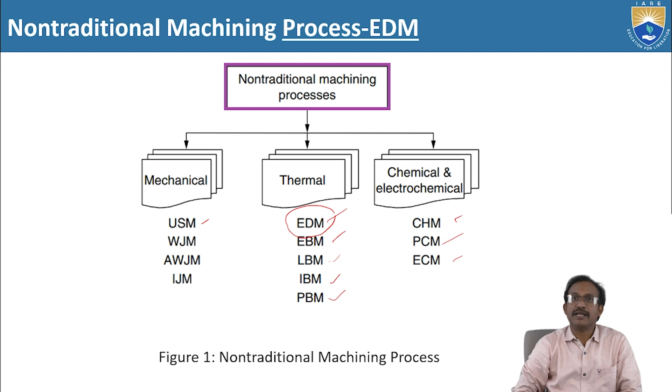So far we have discussed the different fields of electro discharge machining. Under that we have discussed electro discharge grinding and abrasive electro discharge grinding. Now we are going to discuss abrasive electro discharge machining.

Abrasive electrical discharge machining, in short AEDM, is a hybrid process based on EDM, that is electro discharge machining, where free abrasive grains such as silicon carbide powder are added to the dielectric liquid.

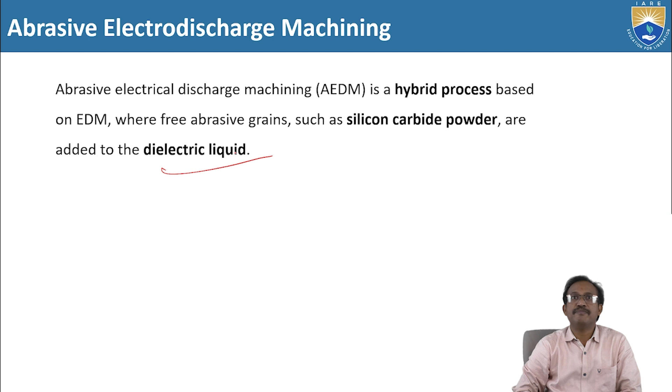Here the abrasive particles are added to the dielectric fluid medium so that it will be just like a slurry. That is nothing but abrasive electrical discharge machining.

Now look at these elements of abrasive electro discharge grinding process. Here, in abrasive electro discharge grinding, it is divided into two main phases: one is the grinding phase, the other is the electro discharge machining phase.

In the grinding phase, it is the MA phase, that means machining by abrasion, where the abrasion is done through grinding. In electro discharge machining, the corresponding phase is the EDE phase, that is electro discharge evaporation phase, usually in the form of plasma. In grinding, the MA phase is in the form of abrasive.

These two get together to form an abrasive tool. Here this abrasive tool is the cathode and the workpiece is the anode. Between these two, dielectric fluid medium passes, and the gap between the abrasive tool and the workpiece is the spark gap, where the spark is generated, usually below 0.01 millimeters.

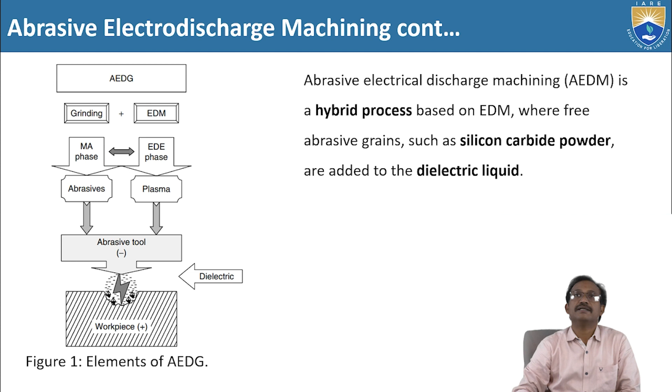In addition to the major EDE thermal phase, MA assistance is added. The EDE phase is as usual in electro discharge machining, but here through this grinding process, the MA phase, machining by abrasion, occurs because of the abrasive particles.

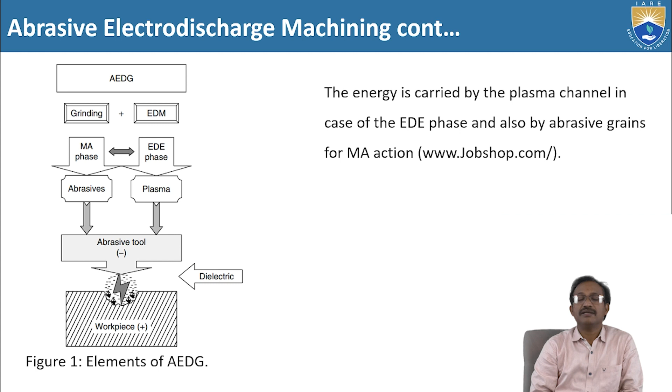The energy is carried by the plasma channel in case of the EDE phase, and also by abrasive grains for the MA action. The total energy is carried by these two components: the plasma phase component in the EDE phase, and the abrasives in the machining by abrasion phase.

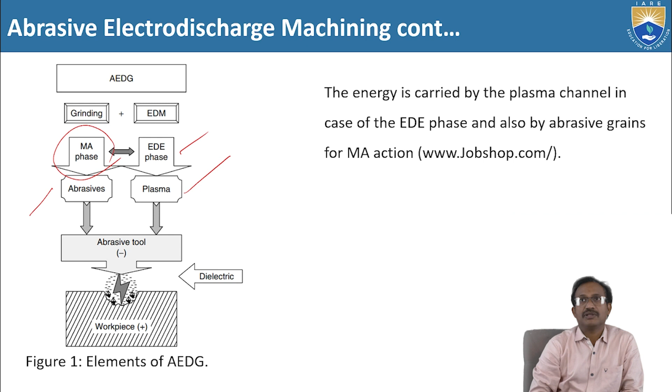Now look at this abrasive electro discharge machining system. Through this channel or arrangement, dielectric plus abrasives are supplied to the workpiece and tool. Here the rotating tool rotates and the workpiece travels towards left or right based on the requirement.

At the time of this machining process, since this is a hybrid process, the dielectric fluid medium consists of abrasives. Through this nozzle, dielectric and abrasive particles are supplied constantly or circulated between the rotating tool and the workpiece.

See, the machining media consists of dielectric and solid particles as indicated in this figure. Here the tool is rotating about its own axis, and it can traverse up and down: feed plus vibration plus orbital motion.

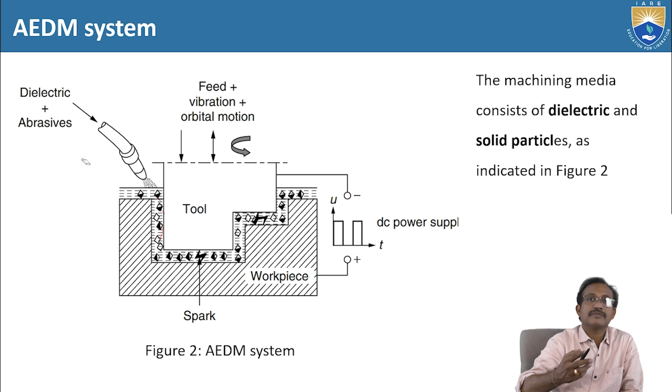Because of the tool motion, and at the same time because of these abrasive particles along with the dielectric fluid medium, the machining process takes place. So that's why it is a hybrid process.

In the abrasive electro discharge machining system, let us discuss the mixing. Mixing silicon powder into the dielectric reduces the electrical capacitance across the discharge gap by increasing the gap size.

Okay, mixing silicon powder into the dielectric. See here, this is silicon powder, let us say, mixed into the dielectric fluid, which reduces the electrical capacitance across the discharge gap by increasing the gap size. As a result, there is better dispersion of sparks and improvement in the discharge characteristic, especially in the machining of a large workpiece.

So here let us focus on the result of mixing silicon powder in dielectric fluid medium: better dispersion of sparks and improvement in the discharge characteristics, especially in the machining of a large workpiece.

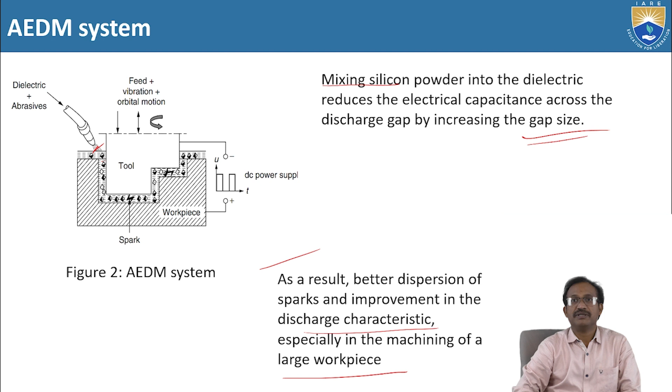The introduction of mixed powders as working media allows abrasive electro discharge machining (AEDM) to produce complex shapes having a mirror finish and an affected layer which is uniform and free from cracks.

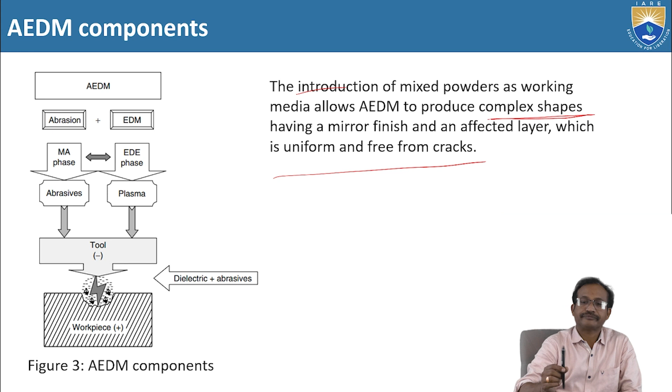Let us discuss the uses of AEDM. AEDM, that is abrasive electro discharge machining, is widely used to produce dies without the need to remove the heat affected layer using mechanical polishing. So here, without affecting the heat affected zone - that is the important point.

The process is therefore widely used for producing plastic molding dies. So a very particular application of AEDM is to produce plastic molding dies. Why? Because it is not necessary to remove the heat affected layer using mechanical polishing.

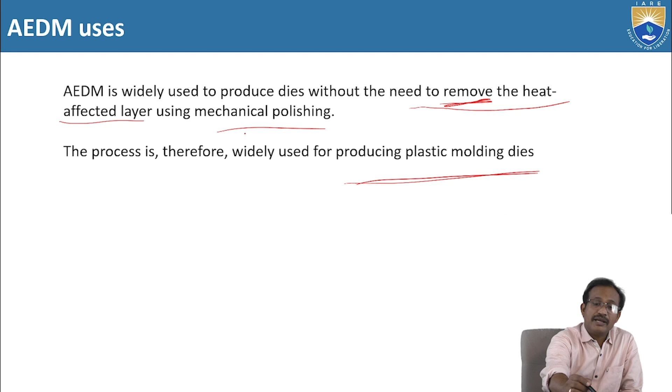Let us discuss surface modification of materials. AEDM is also adopted to modify the surface characteristics of tool steels - as we discussed in the last presentation regarding tool steels and tungsten carbide. The fine tungsten carbide powder added to the dielectric adds alloying elements and hence enhances the hardness and corrosion resistance of tools and dies. So by this way we can modify the surface of the materials through AEDM, particularly for tool steels and die steels.

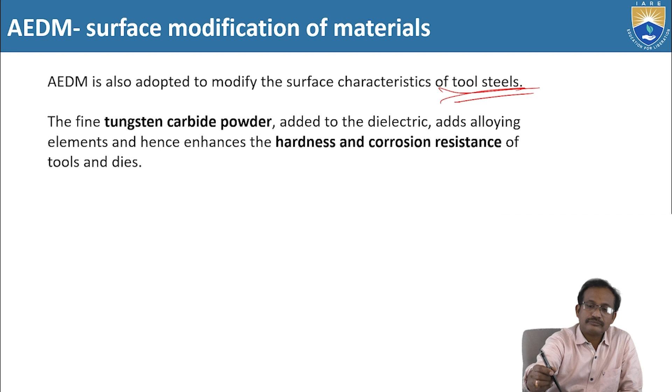Surface modification of materials for other materials: it also improves their tribological features and changes the surface roughness. Here tribological refers to wear and corrosion, wear and friction of the materials.

Deposition of aluminum on steel and titanium carbide on aluminum using respectively aluminum and titanium based alloy electrodes. So here the electrodes are aluminum and titanium based. These can be used for surface modification with aluminum on steel and titanium carbide on aluminum. These are the references for this.

Powders such as silicon and tungsten have been used to increase the hardness and corrosion resistance of steel workpieces. That's why powder coatings are applied for these materials.

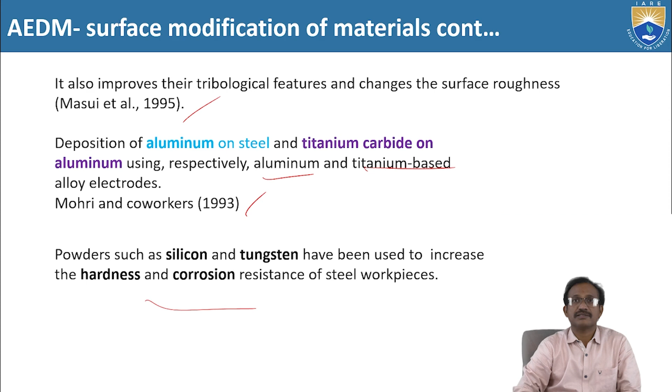Now let us look at the working of the EDG schematic. EDG means electro discharge grinding. Electro discharge grinding removes conductive materials by rapid spark discharges between a rotating tool and workpiece that are separated by a flowing dielectric fluid. See here, this is the rotating tool.

The workpiece is controlled by a servo control mechanism for feeding towards left or right. Here the spark generates between the tool and the workpiece, and the dielectric fluid medium is constantly supplied between the rotating tool and the workpiece.

Here the power supply is DC. The tool is connected to the negative terminal and the workpiece is connected to the positive terminal. The spark generates between the tool and the workpiece. Here the tool is a non-abrasive metallic wheel - it is nothing but a plain rotating wheel.

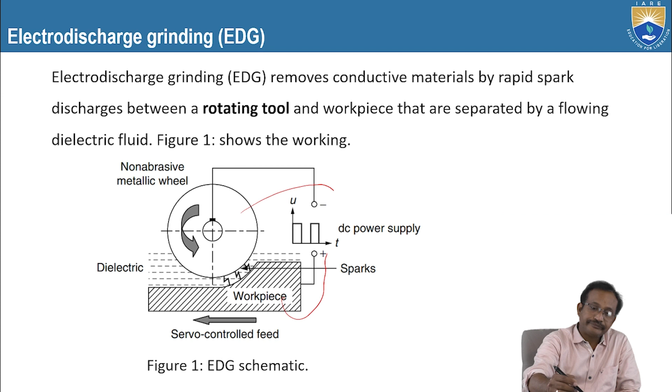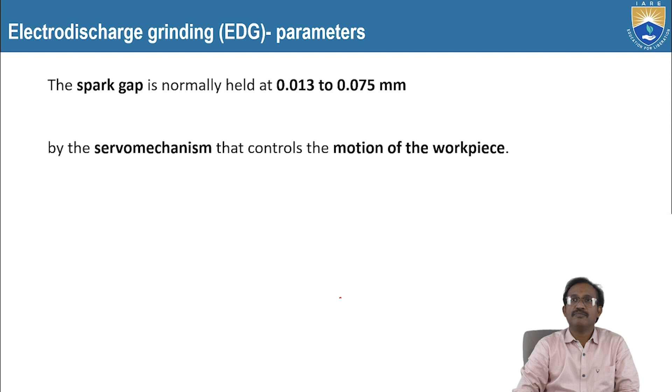The spark gap is normally held at 0.013 to 0.075 mm. So 0.075 mm is the maximum spark gap; it is less than that, with the maximum being 0.075. The spark gap is normally between 0.013 to 0.075 mm, controlled by the servo mechanism that controls the motion of the workpiece towards the left and right side.

Electro discharge grinding: the DC power source has capabilities ranging like this - current 30 to 100 amperes, frequency 2 to 500 kilohertz, voltage 30 to 400 volts. Let me reiterate: the current parameter is in between 30 to 100 amperes, frequency is in the range of 2 to 500 kilohertz, and the voltage is in the range of 30 to 400 volts.

Now let us focus on the speed parameter, speed of the rotating wheel or tool. The rotating tool must be conductive, usually made of graphite, and its speed is 30 to 180 meters per minute.

Speed of the conductive wheel, usually made of graphite, is 30 to 180 meters per minute in a dielectric bath of filtered hydrocarbon oil. The dielectric fluid medium is filtered hydrocarbon oil. It should be filtered since during machining, particles removed from the material mix into the dielectric fluid along with abrasive particles, so filters are used to separate them.

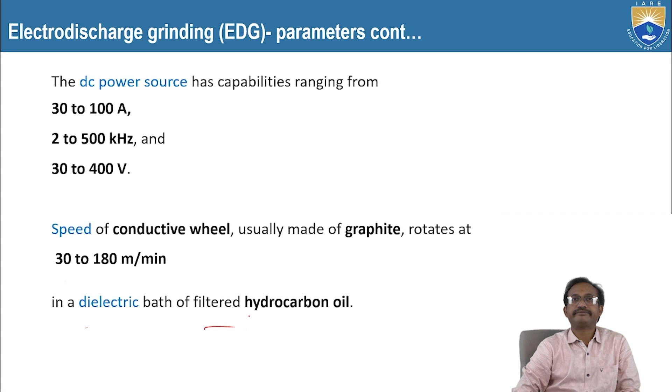Electro discharge grinding is a common process, but the power supply must be DC. The workpiece is connected to the positive terminal of the power supply, and the tool is connected to the negative terminal.

A stream of electric sparks is generated between the rotating tool and the workpiece. Each spark discharge melts or vaporizes a small amount of metal from the workpiece surface. This is electro discharge erosion, occurring due to the spark between the tool and workpiece, with no abrasive particles involved.

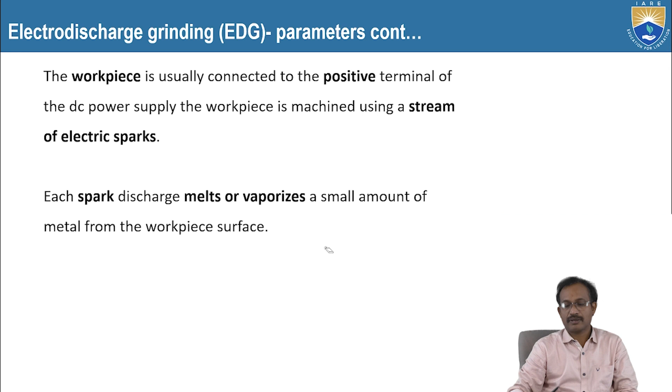The electro discharge evaporation phase removes material from the workpiece. Here, current is the important parameter. Higher machining currents produce higher machining rates.

However, higher current produces a rough surface finish and a deeper heat affected zone in the workpiece. In other words, less machining current produces a low machining rate but a smoother surface finish with less damaged surface. So as current increases, the machining rate becomes faster, but we do not get smooth surface finish, only rough surface finish, with a deeper heat affected zone. Less machining current is used for producing smoother and less damaged surfaces.

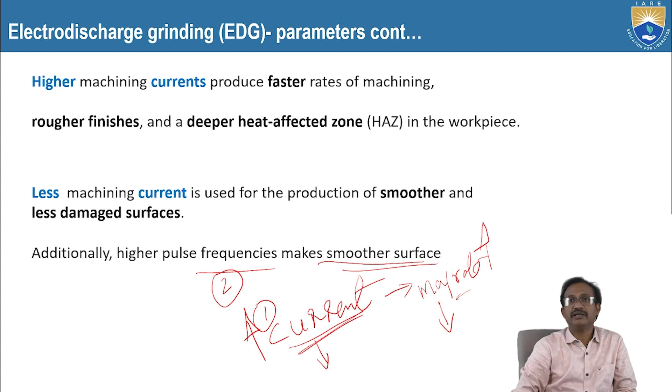Now let us come to the frequency parameter. Current is parameter one, frequency is parameter two. High pulse frequencies make the surface smoother, exactly reverse to the current parameter. If current increases, only rough surface finish is obtained, but if the frequency parameter is higher, smoother surface finish is produced.

Now let us focus on the wear of the wheel. When the rotating tool removes material from the workpiece, it will be subjected to considerable wear, ranging from 100:1 to 0.1:1 with an average of 3:1, depending upon current density, workpiece material, wheel material, dielectric fluid medium, and sharpness of corner details. These parameters influence the wear characteristics of the rotating tool.

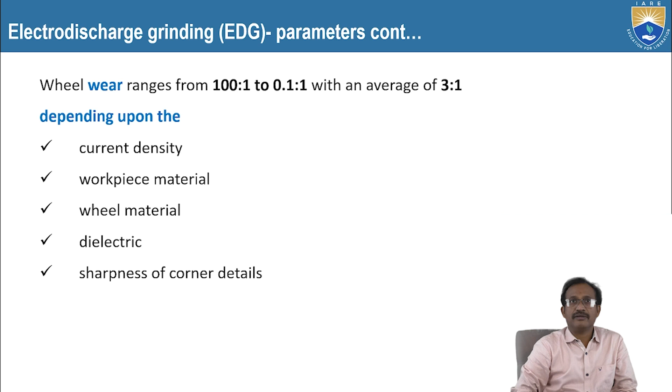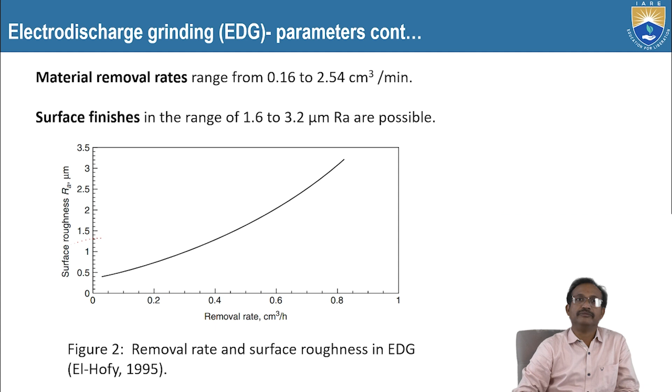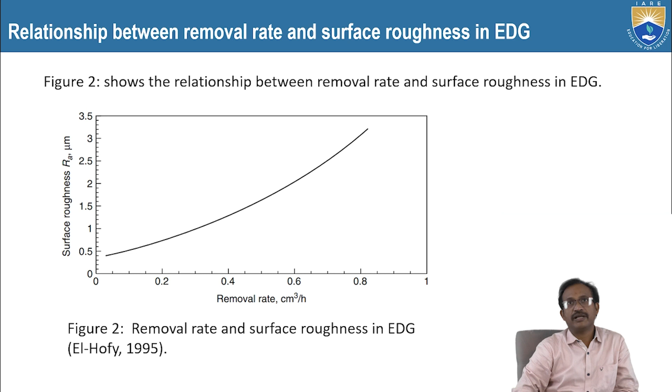At this surface roughness, the removal rate should be higher but it is actually a little lower, because the relationship is not straight. Similarly, if we consider it as a straight line, the surface roughness would be higher, but the actual surface roughness is somewhat lesser. Material removal rates range from 0.16 to 2.54 cubic centimeters per minute, and surface finish in the range of 1.6 to 3.2 microns is possible. This shows the relation between surface roughness and removal rate in the electro discharge grinding process.

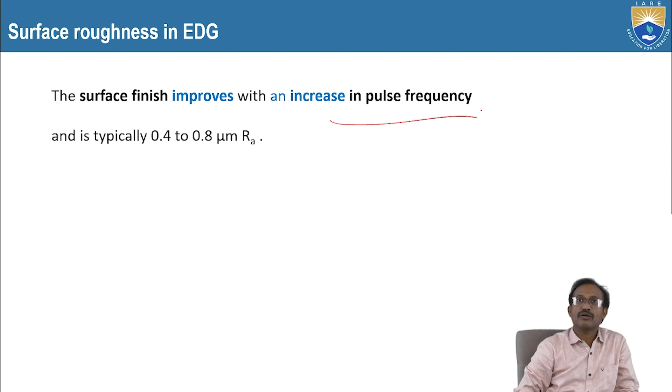Surface finish improves with an increase in pulse frequency and is typically 0.4 to 0.8 microns. As discussed, if current increases, we get rougher surfaces, but if pulse frequency increases, we get smoother surface finish.

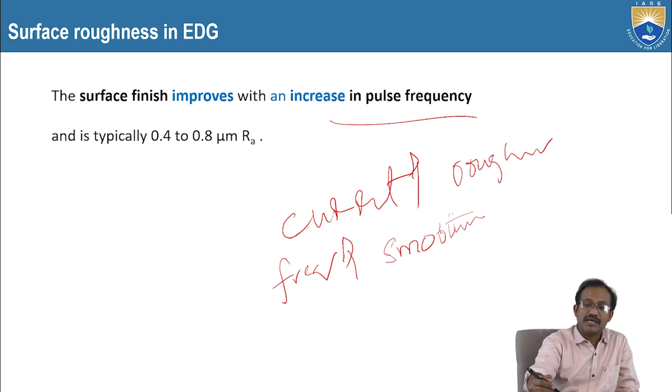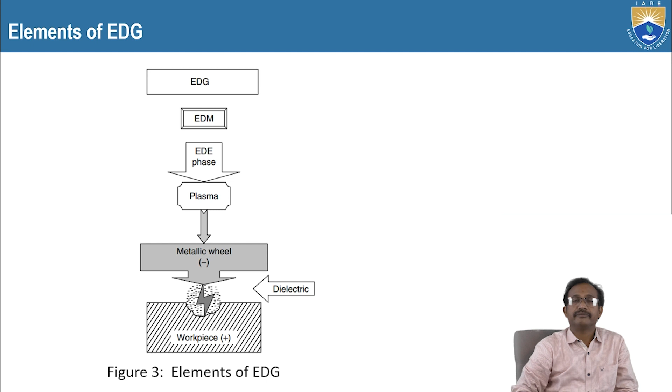In abrasive electro discharge grinding (AEDG), it employs the interactive effect of two phenomena: EDE, electro discharge evaporation, and MA, machining by abrasion. These two phenomena are involved in abrasive electro discharge grinding.

In the abrasive electro discharge grinding process, the metallic or graphite electrode is used in electro discharge. So the focused points or takeaway points are these two: EDE, electro discharge evaporation, and MA, machining by abrasion. These two combine so that it becomes abrasive electro discharge grinding.

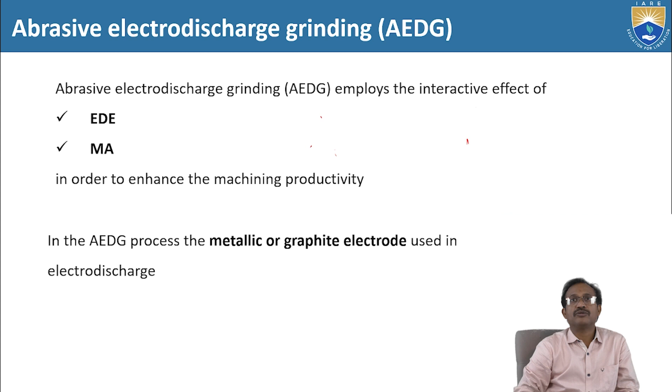Here, in place of the earlier simple or plain rotating tool, we have a metallic bond abrasive wheel. Again, the tool rotates, and the workpiece is controlled with a servo controlled feed mechanism. The dielectric fluid medium constantly circulates between tool and workpiece, and the tool is connected to the negative terminal of the DC power supply while the workpiece is connected to the positive terminal. Here the spark generates between the tool and the workpiece; the tool is said to be cathode and the workpiece is said to be anode.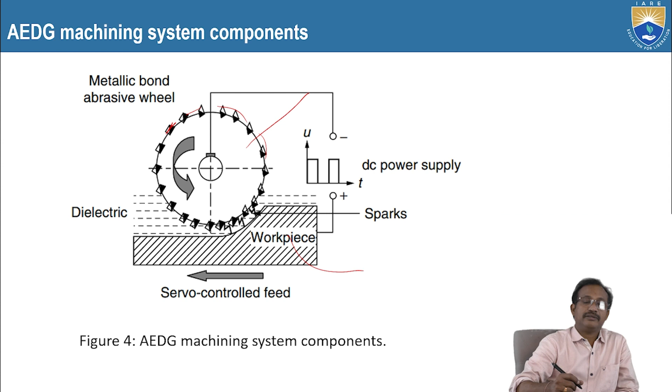Let us discuss the material removal mechanisms in abrasive electro discharge grinding. Focus on this metallic bond and this abrasive grain. These abrasive grains will directly remove the workpiece material, and this metallic bond and the workpiece will not come in contact directly, but a spark will generate between these two. This spark will melt or vaporize small amounts of the workpiece surface material, so that material removal takes place.

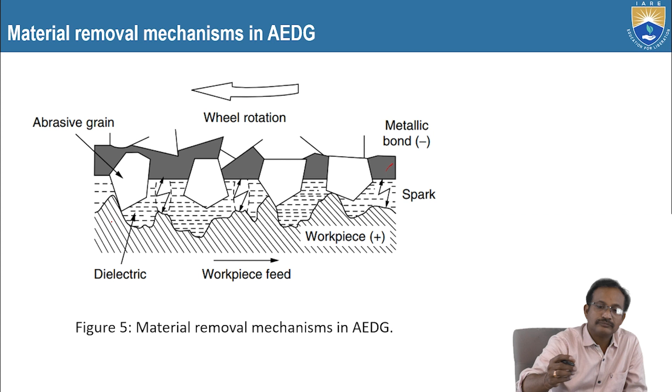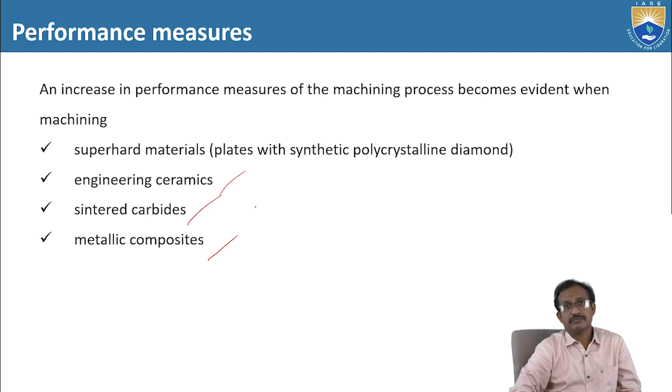Regarding performance measures, an increase in performance measures of the machining process becomes evident when machining super hard materials, engineering ceramics, sintered carbides, and metallic composites. The electric discharge causes a considerable decrease in grinding forces, lowers the grinding wheel wear, and provides an effective method for dressing the grinding wheel during the machining process.

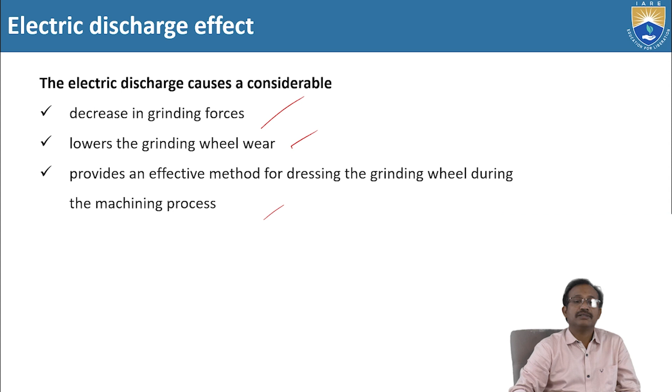Now look at this material removal rate for EDG versus AEDG. EDG means electro discharge grinding, AEDG means abrasive electro discharge grinding. Let us compare: the relative material removal rate for EDG and AEDG process was compared to the material removal rate for the electro discharge process under the same conditions.

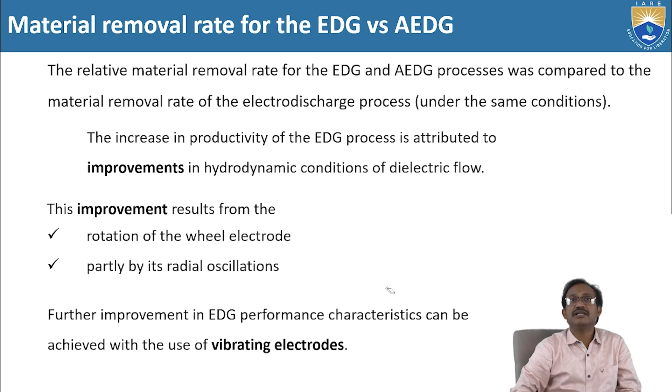The increase in productivity of the EDG process is attributed to improvements in hydrodynamic conditions of the dielectric flow. This improvement results from, number one, rotation of the wheel electrode, partly by its radial oscillations. Further improvement in EDG performance characteristics can be achieved with the use of vibrating electrodes; if it vibrates, it adds some additional removal rate. By this way we can compare the performance or the material removal rate.

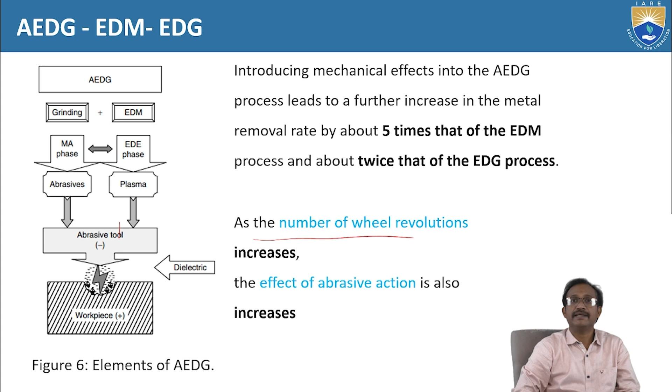As the number of wheel revolutions increases, the effect of abrasive action also increases. That means if we increase the speed, we can increase the abrasive action, and subsequently the material removal rate will be higher. So as the speed of the tool increases, the material removal rate will also increase.

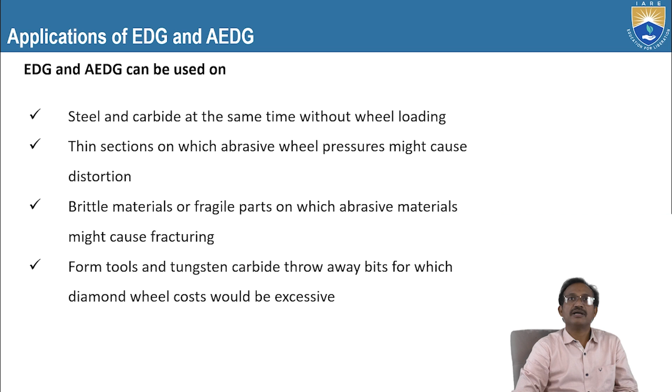Applications of EDG and AEDG: steel and carbide at the same time without wheel loading; thin sections on which abrasive wheel pressures might cause distortion; brittle materials or fragile parts on which abrasive materials might cause fracturing; and form tools and tungsten carbide throwaway bits for which diamond wheel costs would be excessive.